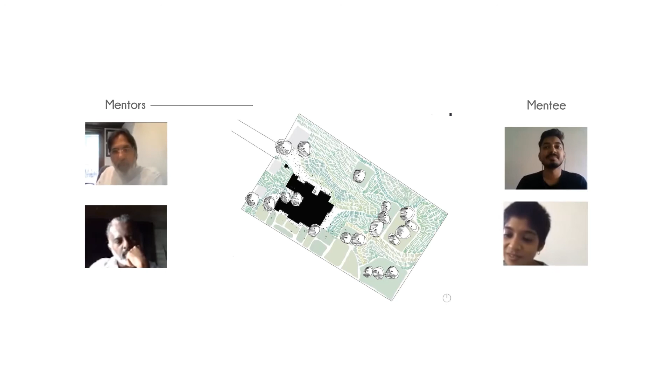In a socially distanced world, Design United is an optimistic digital platform for collaborative design and connection. Design United was created in March 2020 during a period of intense lockdown and quarantine measures within the region. The aim behind Design United was to create an optimistic space for regional dialogue, connections, collaborations, and opportunities for young regional designers and design practices. A much needed network of support and peer mentorship during these uncertain times.

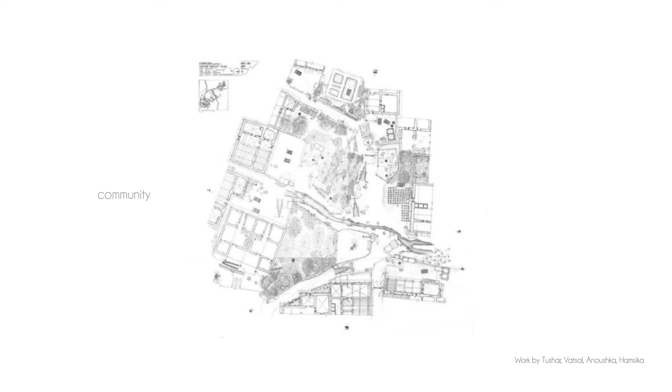Talented young designers and design studios working on design innovation with an approach that is relevant to our South Asian region have been invited to be a part of the platform. We also encourage design students from the region to share their work, be involved in the dialogue, and to be an active part of Design United. Design United, most of all, believes in creating a community of designers and design knowledge that is largely contextual, with focus on contributing to the environment and our community. Design United believes greatly in a spirit of collaboration and idea exchange.

Design Conversation and Design United features talented emerging designers and practices from our South Asian region. Practices which are innovative and bear a deep contextual resonance with the place they are from. Today is a special conversation titled Narratives from the Mountains, where we are featuring two wonderful high-altitude practices, Abari from Nepal and Studio Interweave from Sikkim, India. I'm Varna Shashidhar, founder principal of a regional landscape practice, VSLA, based in Bengaluru.

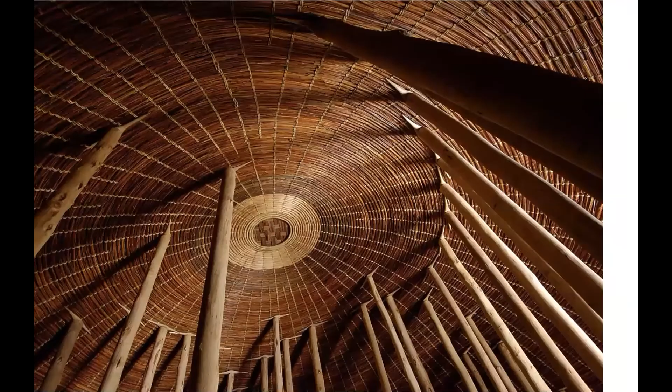Or like beautiful woven architecture from Africa, just using plant fibers, or the 9-story earth skyscraper from Yemen. This is built in a very hot and dry climate, and yet it doesn't need any external cooling. It looks beautiful. It's got its beautiful character, identity. It's very comfortable to be in, and moreover it's earthquake resistant.

And so with all this inspiration, I was always interested to look at how vernacular could be put into modern context. We're not conservation architects. We're not trying to build as it was built 2000 years ago, but trying to use that sensibility and see how it can fit into modern context. If you are aware of Nepal's geography, it's got the plains and it's got the mountains, it's got the Himalayas.

So we have amazing diversity of architecture, from flat earthen-roofed architecture to beautiful woven bamboo architecture in the plains where it rains a lot, and in the desert where it doesn't rain, you have beautiful earthen architecture. So this is our starting point.

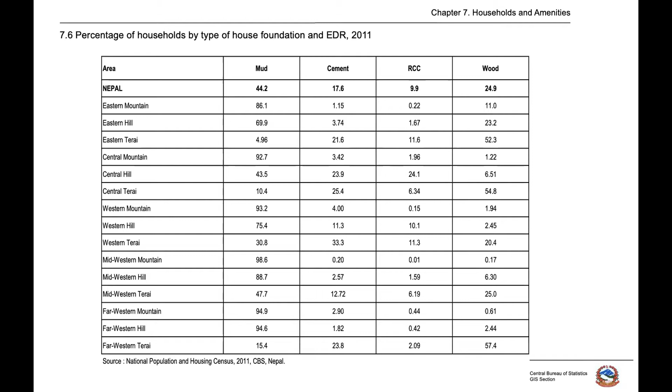Just to give you a small background, the whole of Nepal has only 17.6% cement penetration, and that's mostly in the cities. But in many of the villages, in regions, it's as low as 0.2% cement penetration. That means 99% of the buildings are built with local and natural material.

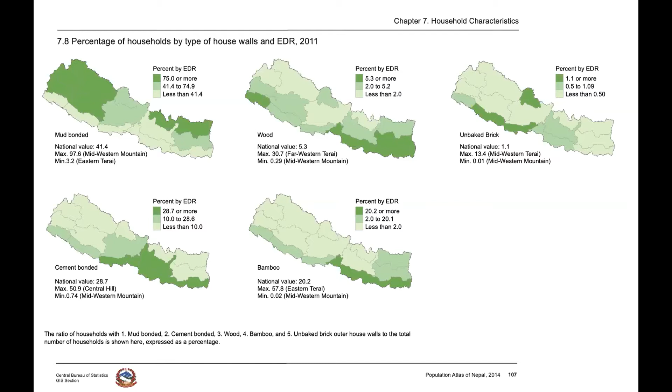And our policies are against these kinds of buildings. Our academia thinks these buildings are too primitive, too kacha, and even our media shows our tradition as a sign of embarrassment or a sign of poverty, right?

So I'd show this picture from Kathmandu from 1930, beautiful earthen buildings, and see how it has gradually evolved and become a concrete jungle, right? This is all in the name of modernization and development. Look at Kathmandu now, which has the highest concentration of World Heritage sites, now turned into a concrete jungle. And it's got no identity.

You look at any of our South Asian cities, they all look the same. They've got no character. Whether it's a picture of Delhi or Dhaka or Kathmandu, it doesn't make any difference. So why are we still using steel and concrete?

Because there is this unfounded claim, which is kind of a lie, that steel and concrete is very strong and can survive all the earthquakes, right? It can if it's properly designed. Same with earthen buildings. If it's properly designed, it can survive the earthquake.

This is a picture from Sindhupalchok district, which was the epicenter of the earthquake. In this region, many of the concrete buildings, as high as 3-4 stories, came down, right?

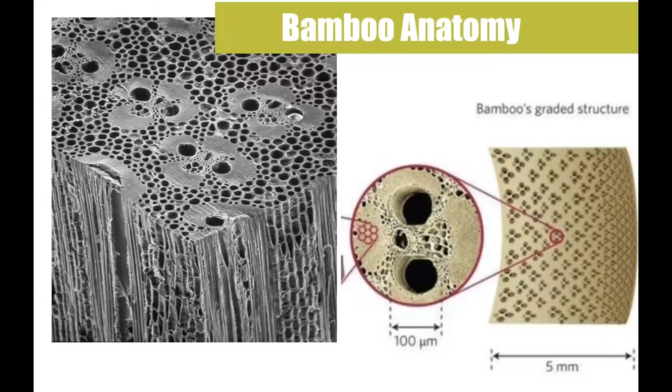So despite this, why aren't people using bamboo? Because there are certain traditional issues. One was the joinery. Bamboo is not a homogeneous material. It's hard to join two or three more pieces. So we looked at different ways of connecting them. We use steel, we use epoxy, we use rattan.

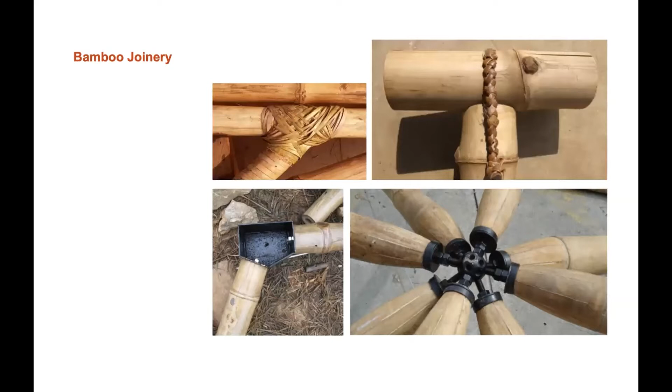We are experimenting. But the small connection, we did a lot of research and design and found to be very strong, was this steel bracket tied in with a barrel nut system, which creates a very strong tensile member. Using this technology, we could go higher and bigger, you know. So there was a major breakthrough.

And the second was treatment. Bamboo is very strong, but it's not very durable in its natural context. So what we did is we developed a very simple pressure chamber by hacking our gas cylinder. We added some inlet and outlet to put preservative in, and then connected it to the ends of bamboo, which would push out the starch.

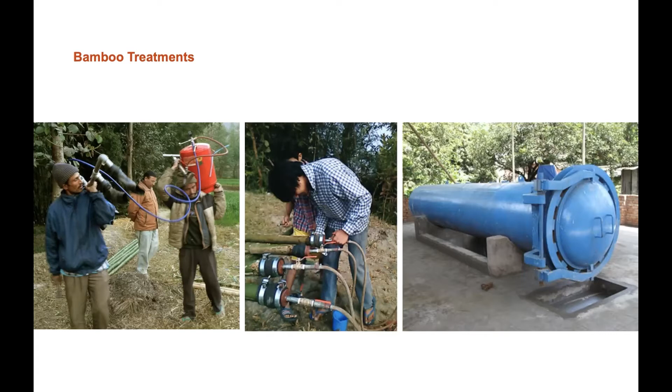Boom, a very simple technology can have a very lasting impact. From bamboo that lasts 3 years, now it lasts 40, 50 years or more. Or there are other technologies, like pressure treatment, to do this. So with these small but very meaningful innovations, we try to build structures.

And my interest was to build public spaces, because as you saw in previous slides, we have a lot of beautiful earthen buildings, earthen houses, but public spaces like schools and hospitals are relatively modern interventions. And these are only made with steel and concrete. So I thought, if we can intervene and make public structures, that would be great.

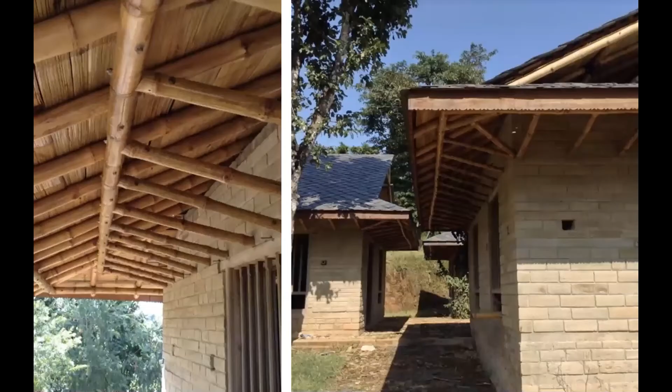So this was the first structure we did with bamboo, 10 meters, made a beautiful vaulted arch. And then the second was in schools. Same as in India or many South Asian countries, our government schools are very uninspiring, very boring. They're made with bricks and steel truss and galvanized sheet.

If it gets hot, it gets super hot. If it's cold, it's super cold. If it's raining, it's so loud that you cannot be inside. So we had a small hypothesis. What if we used local materials, slates, stones, bamboo, whatever is locally available, and make a school, what you call Anganwadi, an early childhood village.

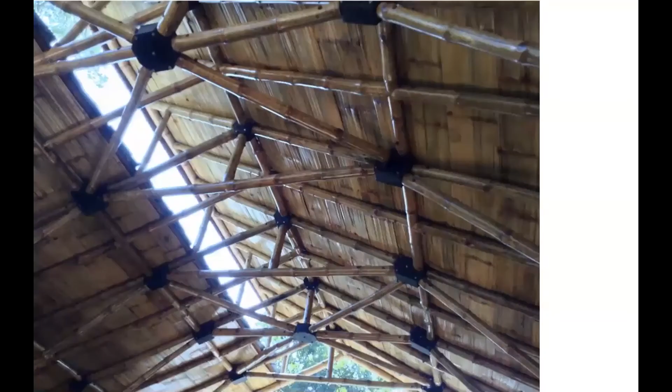And we used bamboo struts, and we had nice ventilation inside. We salvaged drain pipes to make windows, recycled beer bottles to bring in light, nice big wooden windows from locally harvested wood, and beautiful earthen plaster. Very light and spacious, and yet at the same cost. Moreover, the cost was going directly to the community instead of some industrialist, right?

So what happened is when we did this, by coincidence, this happened to lie right at the epicenter of the earthquake, right?

And this was the only building that survived in the whole region. It was a big vindication for us, for our technology, and to gain public trust that it can be strong. So it was a great moment, and the government was very receptive to these ideas.

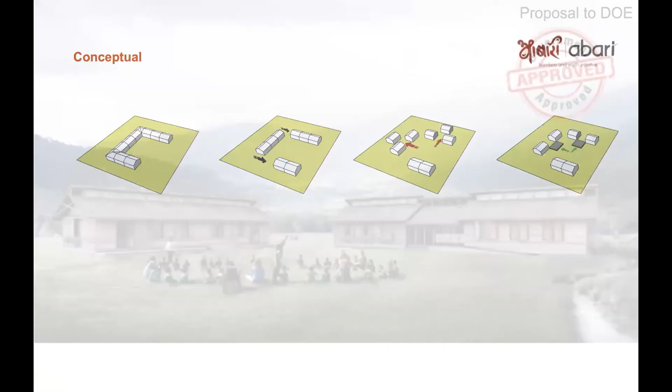So we designed an open source school because there was a big earthquake and I think 40,000 schools needed to be built, and we didn't have the capacity, or we didn't even want to build so many schools. So we gave out free information to the public. We took a traditional design, opened it up, put some nice ventilation, put some insulation, nice earthen plaster, a design that can be replicated across the country. A very modular design that can fit in different places.

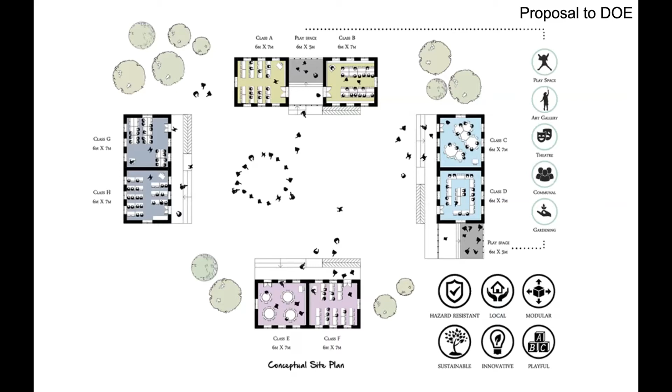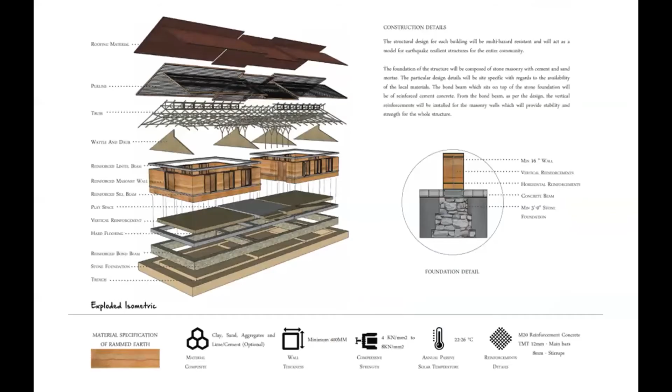So we took a traditional government school design because we didn't want to be very ambitious, because if you have an ambitious design, there'll be a lot of resistance. So we just pulled it out and put some play space, and we built many schools like this. This one you see, the bricks are compressed earth blocks, and then we used bands, and then nice ventilation, and if you look at the ceiling, a bamboo ceiling with steel brackets.

When you go inside, it's so nice and cool. A lot of people say it feels like you're inside a basket. It's got a very meditative property, and even the bench that you see is made with bamboo, and it's got formica, so you can write on it. It's liftable, it's modular, you can bring it together. So the idea was to show that you can build your community infrastructure using local technology, local resources, and it can be meaningful, can be inspiring.

And the bricks were so easy to make. We made this compressed earth block machine, and even the women were making these bricks. We built about 25 schools with this, some ourselves, and some people downloaded the design and built it themselves. It was a great moment for us. Just to give you a small breakdown, when we built it, 89% of the materials were local materials, so that means the cost remained locally. Only 11%, materials like steel and concrete for reinforcement, were brought from outside.

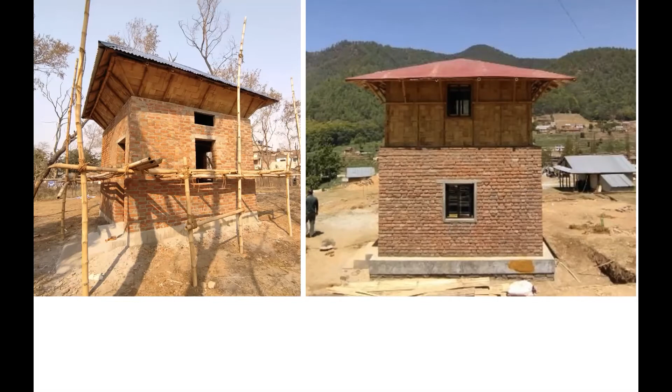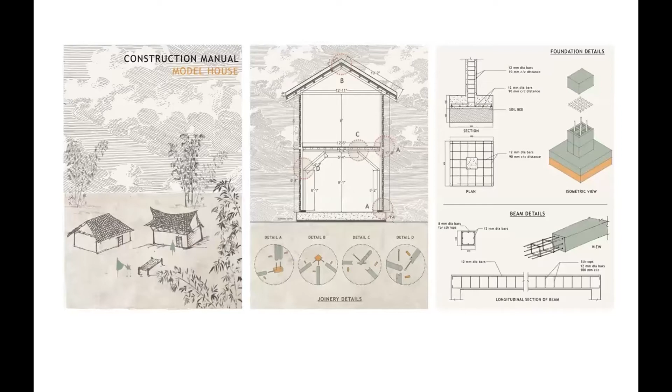So we are building this, and we've put out a lot of these open source documents. This is Sukumbasi housing, that means for homeless people, a very small model which they can replicate. This is the interior of it; in 2 lakh rupees, you can build the whole house, or these model houses using lime. So we're putting all this information out so people can copy and do it.

What I've realized in all this journey is that it's the perception, not the technical part of bamboo and earth, that is a hurdle to build. So after the earthquake, we were very privileged to build one of the oldest national archives with bamboo, with our material. It's a public archive right in the center of Kathmandu, built with bamboo and earth and mud. Five years ago, we would not have even thought of it. So with small interventions, there's a big public leap of faith.

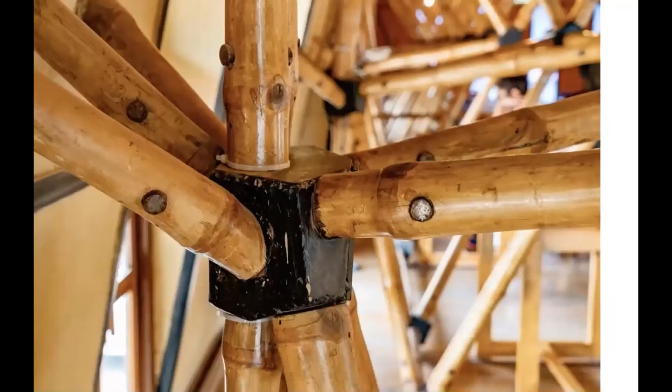We've used a traditional vernacular style. We've put earthen plaster, beautiful rammed earth, clay tiles on top. We use modern elements for joints, and have plumbing and electricity inside. This was another big moment for us when we built a public library in the heart of the city. And then people are getting more ambitious, more trusting.

So there's another school that we finished relatively recently, about a year ago, with a beautiful rammed earth wall. In our rammed earth, we don't use cement. And there's a beautiful texture, if you can see the red fades into yellow earth, and we put some birds, making it very playful, a lot of open playful spaces with bamboo, so you can climb on it. Even the trusses are so playful that they work as a part of your teaching aid.

We've integrated trees, bamboo walls, and even the design of the landscape is such that it becomes a forest, a food forest. There we don't have many flowers.

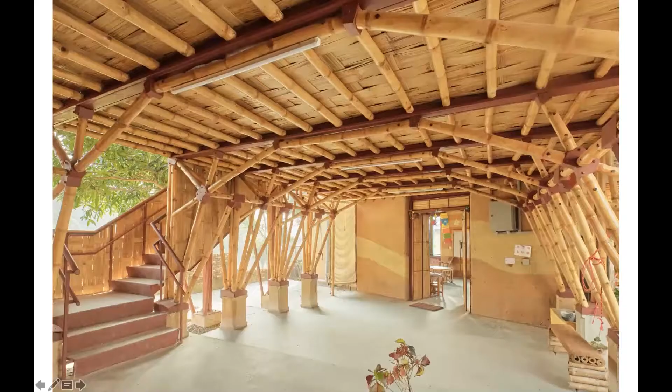We have lettuces and greens, so the kids can cut them and use them for cooking. So here's the interior space, our public space. We are not fanatics; wherever it's important, because we are building public spaces, safety is number one, right? So we can't compromise with safety, but also, we don't want to compromise with our principles, with our aesthetic.

Here are some details, like bamboo stairs, beautiful woven bamboo, so light. My favorite moment is when the kids are touching the walls and touching this, and they don't feel scared of the building, they feel so close to it. And we have high ceilings, so it gives open space.

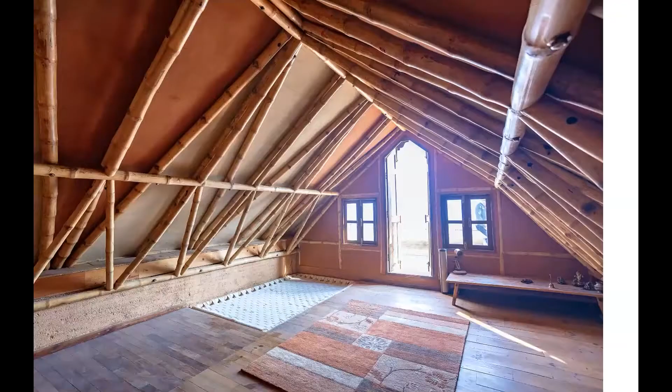So yeah, different structures. We're just trying to promote bamboo and earth in different utilities. Here's a house kitchen, a modern kitchen with plumbing, and we even have an earthen stove. We integrated biogas. We've kind of specialized in waterproofing the earth, so you can even make countertops with earth. Nice attic, meditative space.

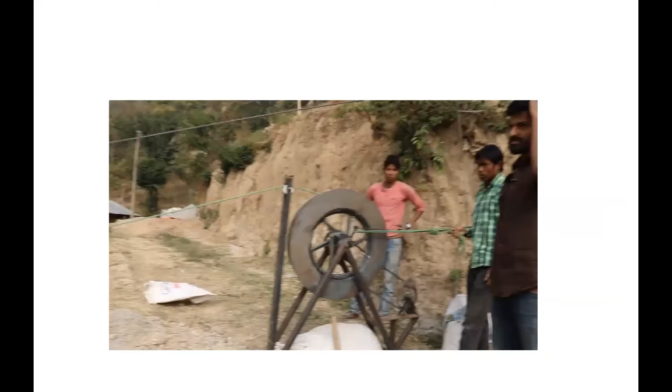Some small technologies to transport the materials, like this. It really makes a difference, to propagate it and make it a mainstream material. More examples of public spaces. So I'll switch topic. I see I don't have much time, so I'm trying to be quick here.

So the second thing that's really important to us is where the material is coming from. Green doesn't mean a green label. For me, green doesn't mean shopping. It's not like you go to a mart, see a green sticker, and buy it, right? You create a whole supply chain. So here's this river bed in Chitwan that we did an experiment with.

This used to be a big forest, but because of government policies, they were at one point promoting cutting down trees to make land for agriculture. This is a photo from 2010, and in 2011 there was a huge flood. All the whites are sand deposits. So we thought, why don't we plant bamboo? It was a social experiment: if we plant bamboo, will it regenerate the land? How long would it take?

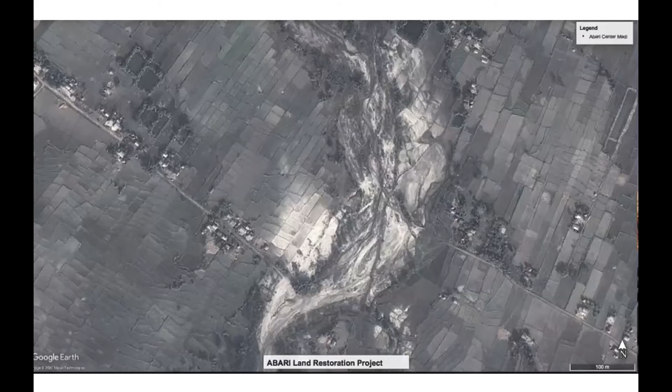So then we started planting bamboo. This is in 5 years. Like I said, bamboo is grass, it grows super fast. And this is in 8 years. It's become a beautiful forest. This is actually a photo from 2 years ago; now it's even more. A lot of birds are coming in, a lot of ecosystems built. It's amazing how nature can regenerate so fast, and bamboo is a great tool to do that.

And what we do is, we've trained this river, and we use the bamboo for our construction. It's a beautiful closed loop, and nothing goes to waste. The river is trained, unlike our modern industry, which is very extractive. If you want to build, you extract. But here you don't have to do that. You can regenerate land and also build a house. It's a win-win situation, a beautiful example. Here's a different view.

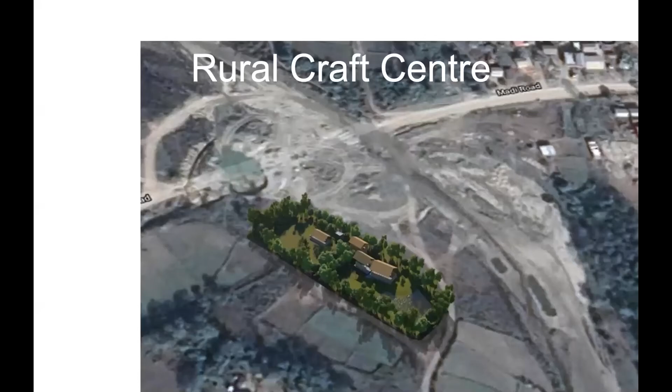All this forest is less than 5 years old. And on the other side, a beautiful rice farm. So bamboo is not taking prime agricultural land; it grows right on the river bank. And it's become such a beautiful ecosystem. We're building this eco house, promoting tourism, doing workshops. We have a rural craft center where people are making bags, furniture, and bicycles.

This is my favorite project. We have this electric bamboo bicycle, or even an electric bamboo dirt bike. It's pretty cool. It's got a 1,000-watt motor, it goes pretty fast and it's pretty comfy.

With this I'd like to close my presentation. Our impacts, it's not our impact, but the impact of bamboo. When you do this, money stays in the economy and the forest is preserved. You create a very small, intimate supply chain. You know where your bamboo is coming from.

You call your farmer, you know, say, I need bamboo, can you send it? You know, it's so personal, right? And you can solve many of the modern problems. You can build schools, you can build monasteries, you can build houses. And moreover, what happens when you do this, you're creating a new identity, you're creating new character.

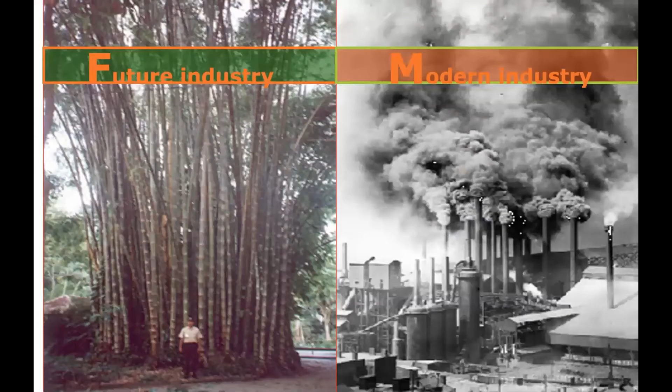I think it's a unique contribution to the world, right? It's the future. This is how I see our future industry. Bamboo, which takes carbon and gives out oxygen, unlike the modern cement industry, which is very, very extractive. In order to solve our human needs, we are pillaging the earth, right?

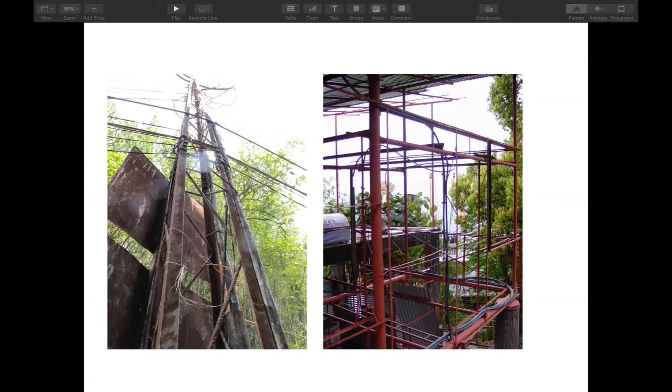So the inspiration for the lightweight structure was these electric poles, which have four angles at the corners, and then they're stiffened by these rebars randomly, and suddenly it becomes very stiff. That's one of the good things about steel, the welding junction makes it stiff. So with very little material, okay, I know it has an environmental footprint, but you can really reduce the amount of material. And I wanted to show in this slide that the corrugated sheet walls and the plywood walls on the inside, the framework for that is very slender. So that whole composite structure makes it stiff. And this is also something that we could think about carrying forward. So yeah, the lightweight had to do with the geological structure. I think Upi is going to take it from here.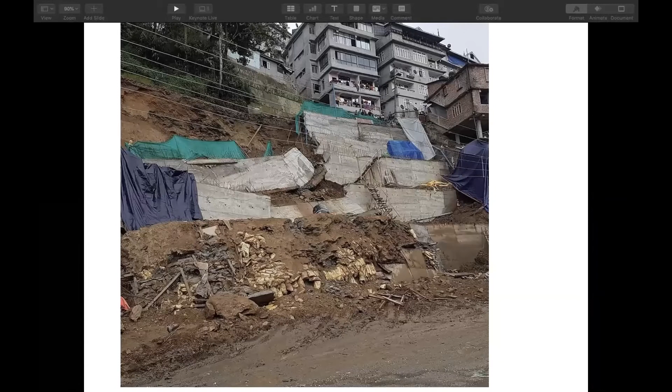So we are in this constant search for an appropriate language which responds to the landscape, the geology, and at the same time is much more economical. So we felt that this was a response to that steep terrain. It is much lower, it has low impact; this one is just a lightweight structure on stilts.

The thing with the material that we've used over here, it's timber, but this timber comes all the way from Scandinavia, to be honest. So it has a huge carbon footprint, because of course, when it comes to sustainability, we have to think of all this. But at the same time, the reason why we chose to use this material is not just quality, actually it was because of the cost of this timber.

It's just like half the cost of the good timber that you get over here. And for us, even for the client, it just made more sense. And also the quality of the timber. So the local timber, we have a lot of problems. It's not seasoned at all, and also the local timber is generally sourced from prime forest.

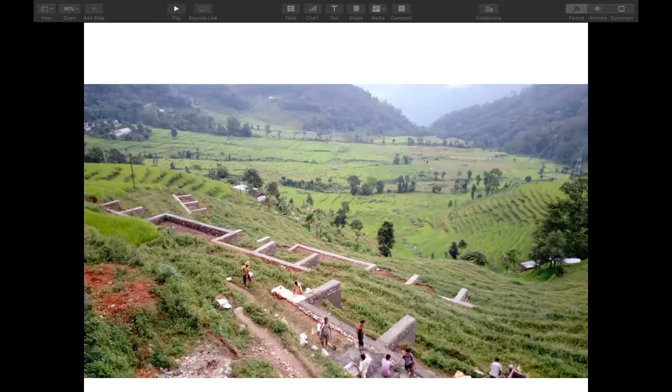But this time we thought we could take a very different response to the initial one. So it's more like learning from a traditional way of building. This was a hospitality project, so we built retaining walls out of stone and cement, and then on top of that we put this very lightweight ikra structure. So this is the traditional form of construction over here.

It's got a timber frame and it has the bamboo infill, which makes it very rigid, and it performs very well during earthquakes also. We feel that it's an appropriate material for this context, and it's also humble and honest, which is rooted to its place. So this is the finished thing.

So the language is again borrowing from a traditional language. The effort was to blend with the surrounding built environment and not to stand out and intimidate the surrounding built environment. So if you see, this is the traditional architecture that you see. So it's not very far from there. It's just adapted to modern needs.

So in the same project, there were cost overruns, and then we thought that timber wouldn't be so feasible for the roof, so we opted to go with bamboo. This is more of a cost saving approach. But bamboo as a material is something that we've always wanted to work with. We see a lot of potential in it, and it's abundant over here, so it's something that we can work with. But the acceptability of bamboo, not everyone is willing to accept bamboo so easily.

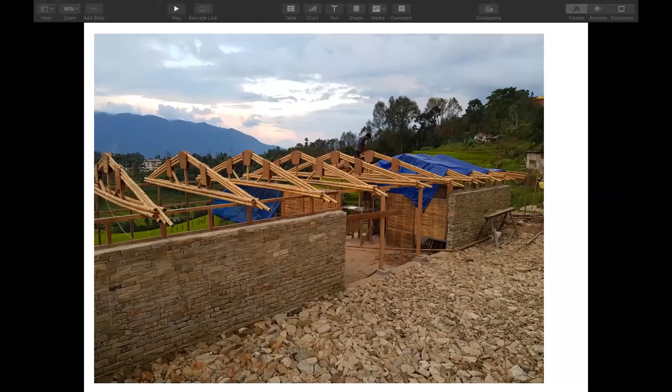Bamboo. So this is another project. It's a homestay in Darjeeling. It's called Bijanbari. So we feel that bamboo, because of its tensile strength, because of its lightweight nature, is ideally suited for steep terrains. Of course, it's cost effective, and because of its tensile strength, it has the ability to take a lot of lateral force. So be it wind, be it earthquake.

But initially it was planned as a house. The client came to us and said, okay, this is going to be a house, this is where I'm going to be living. So we planned it like a house, but this is in a very low altitude near the river. It's very warm and humid, so we wanted to make the whole experience a bit airy, with a lot of ventilation coming in.

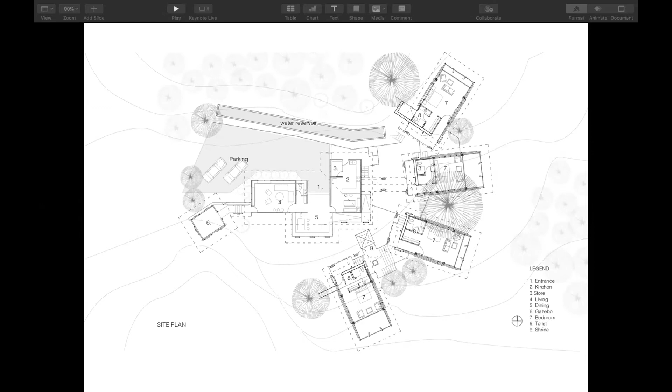But then soon we made this prototype. First, we made one of the units, and then a lot of people were curious about the building. A lot of people started to come in, and soon it became a tourist attraction sort of thing. And so the client decided that he'll turn this into a homestay. So right now it's running as a homestay.

So with bamboo there was a lot of learning, because we hadn't done so much bamboo work. One of the main things about bamboo was this lack of skilled labor. With bamboo, with a basic tool set, it is difficult to build. Just getting the layout, getting the levels even on the terrain, the 90-degree right angles and stuff, is difficult.

The local labor over here is familiar with the material, but not with the new technology and probably not the new designs. So we also wanted to take this material and improve on it, at least on the design front, to suit modern needs. In this project we were also trying to build local capacity. We thought we'll get the local people and help them build their capacity.

But then it was sort of a nightmare because the local laborers have this tendency to drink on site. And so in order to complete this prototype, three of us, Kailash, myself, and one more guy called Karan from office, had to park ourselves on site for 3 weeks, and we actually built it with our own hands. And it was a great learning experience, and that's something that I want to share.

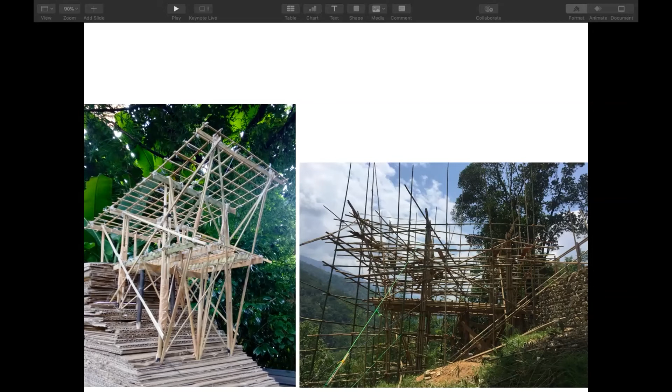And of course there are a lot of challenges in bamboo. The nature of bamboo itself is such that it has its own challenges, at least in terms of the joinery, and bamboo is very susceptible to termite attacks. So treatment and seasoning become very important. I'm not going to get into the detail of that.

But anyway, over here we've used ikra walls as the envelope, because with bamboo it's generally difficult to achieve a draft-proof envelope because of the nature of the bamboo. So we felt that ikra was an alternative. It was an option that was very locally available.

So we felt that we could use ikra as the partition. And so in all of this, we realized that the role of the designer is very important when it comes to making bamboo more acceptable, because bamboo is generally always associated with temporary shelter, or with poverty. So the role of the designer becomes very important: how you design the building and then present it, or express it.

So the same is with ikra, the technology itself. It has always been considered as kacha. Even the banks don't recognize ikra as collateral. So it's kind of weird. And like bamboo, it is also associated with poverty. So in this particular project, it's a residence. We wanted to explore how to make it more acceptable.

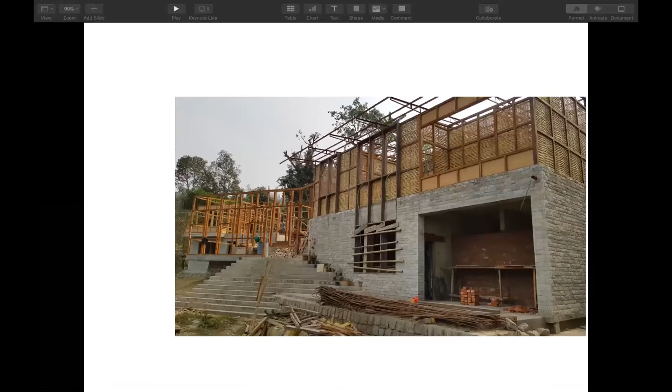This friend of mine was very keen on having a nice residence, and I pitched an idea to him: why don't we make this out of ikra? He liked the idea, and we assured him that it's going to be good. So the idea here was to inquire into the technology, the ikra itself, how it can be improved, and learn from the shortcomings of the technology itself. And this is the ikra frame that is built on top of the stone walls.

I think a lot of times our design decisions are driven by cost; the factor of cost is always there. So we have to think hard. It has to be logical, rational, and structured. If you look at the plan, it's almost utilitarian, and it doesn't have the experiential quality in that conventional sense.

But of course the experiences are much more different, and I feel this approach ties up with our overall approach of incremental growth. We don't want to jump into something very far ahead of us; we want to grow incrementally. By building a project like this, we're hoping the aspirations of people to build in RCC change, so that other technologies which are local and sustainable, and much more suited to our context, are considered.

So a house like this is an attempt at an architectural expression of a contemporary lifestyle in this local context, which also advocates the use of materials that are traditionally relevant. And this is an ongoing quest in the projects that we are involved in. So I'm just going to run through the ongoing projects that we are doing at the moment.

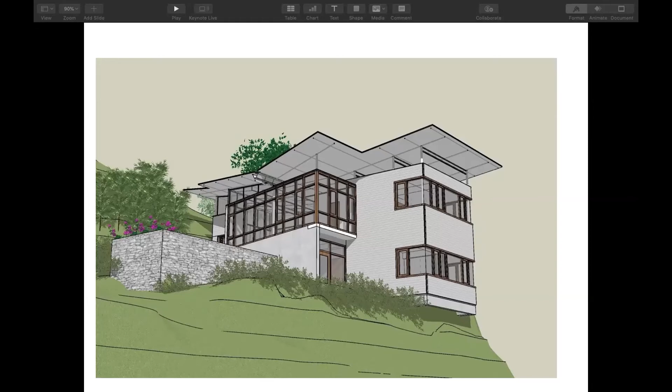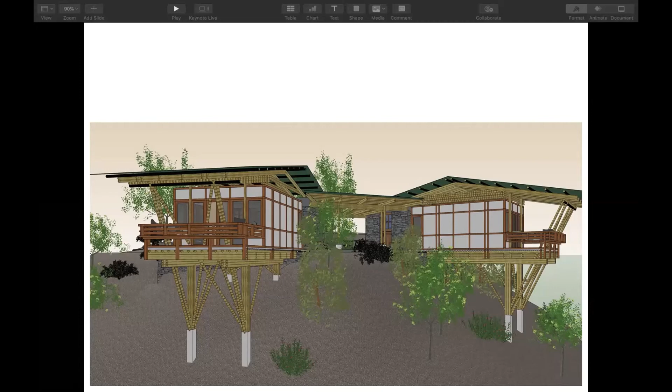So this is another house, again in corrugated sheet and timber, very light. This is another variation of a bamboo building that we're doing. It's an improvement on the earlier design, the Bijanbari project. We tried to reduce the foundation required, because we realized the foundations were getting expensive and much more invasive. So we thought we could improve on the previous prototype rather than working on something else. And this was a project we had done, again in bamboo, but with a slightly different approach.

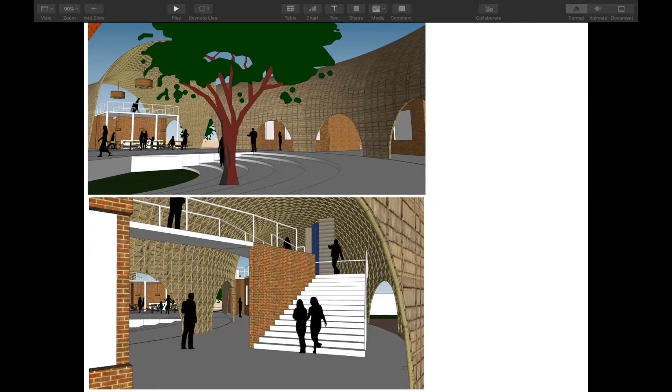It was a project in Nagaland, a museum for crafts and weaves of Nagaland. Since bamboo is locally available and quite popular in Nagaland, we thought we would try it out. Like Nirpal was talking about earlier with this weave, we wanted to create this canopy, a weave over the exhibition spaces. Sadly, the project didn't really take off. So this is how it was proposed. This is another building that we are doing in rammed earth and timber.

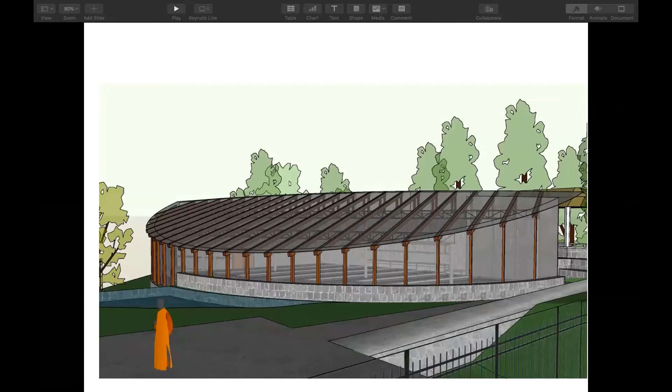So I'm not going to talk more about the design, just going to go through the projects we're doing. So this is a glass house, like for a herb garden. It's in Gangtok only. It's Namgyal Institute of Tibetology.

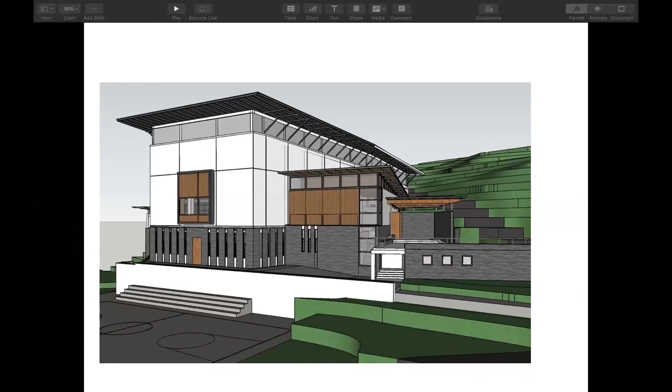So this is another one of the bigger projects that we are involved in. It's a music school. Actually, it's a whole big campus. This is just the auditorium block of the school. It's a music school for underprivileged children. It's in Kalimpong. Would love to share more, but I don't think we have time.

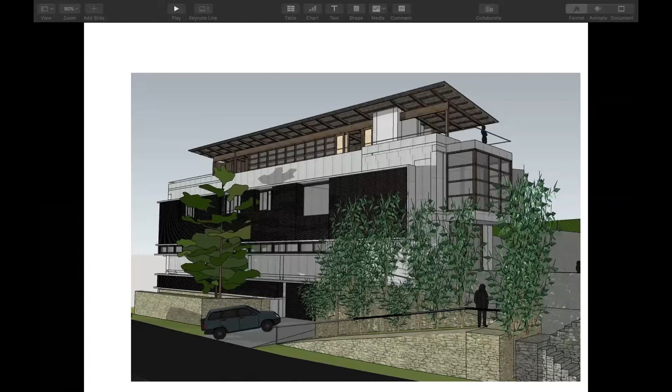This is a residence. Again, this is in an urban environment, so the choice of material is more something that is relatable to the urban context. It's sort of responding, I feel, to its immediate surrounding with the expression of its time. And we still try to weave elements that resonate with the locality, but also not falsify them as ornaments or decorations. So we're quite mindful of that.